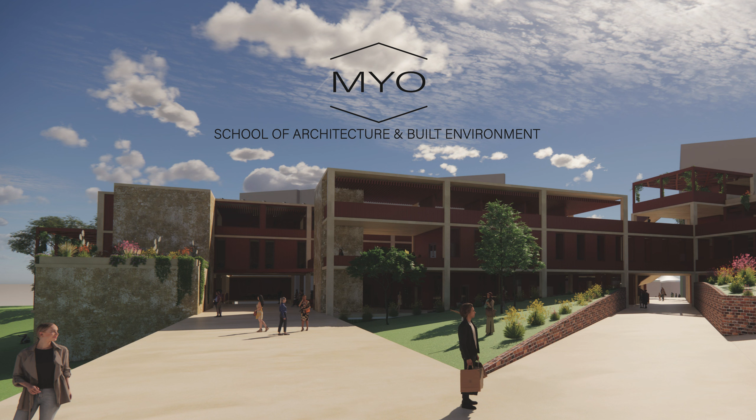I'm now going to present to you a proposed building for the new School of Architecture and Built Environment at QUT Gardens Point, as part of the new Science and Engineering Precinct Master Plan.

It is important to recognize and respect the impact indigenous people have had on the site and their knowledge about the land and environment, their way of living in harmony with the environment, only taking what is needed, connecting with each other and with nature.

The site for the future School of Architecture and Built Environment has opportunity for a strong connection to the river. The river was mainly used for fishing, hunting, and as a gathering space by the indigenous people. It will continue being a space for gathering and sharing of knowledge in this proposal.

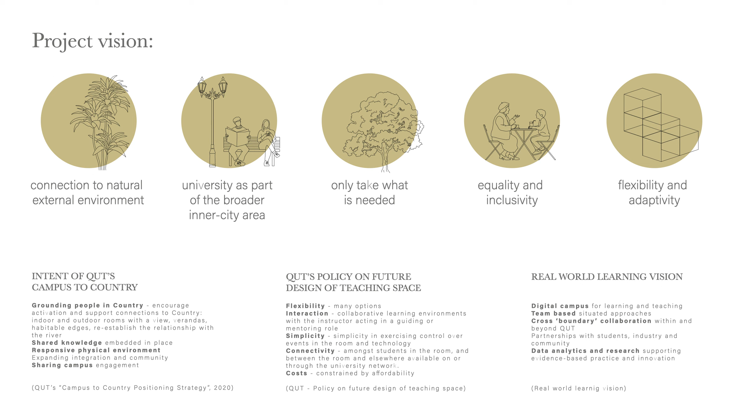This project will focus on five concepts: connection to the natural external environment, university as part of the broader inner city area, only taking what is needed, equality and inclusivity, and flexibility and adaptivity.

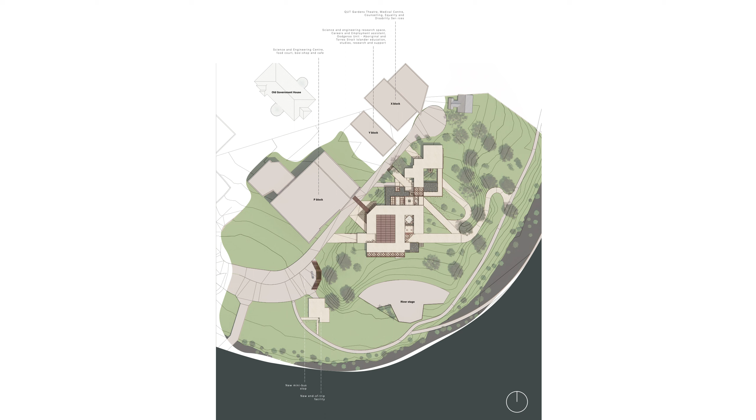As architecture now is part of the engineering faculty, the location of the new School of Architecture has great potential for connecting to the Science and Engineering Center, P Block, as well as Y and X Block. This connection will contribute to QUT's vision of cross-boundary collaboration.

It is important to build for the local climate in order to reduce energy consumed in buildings. In hot and humid climates, like Brisbane, the main priority when it comes to passive design is to keep the heat from the sun away and maximize natural ventilation.

Large parts of this site are highly likely to flood, as we saw a couple of months ago. The building is proposed to be placed above the estimated flood zone by a minimum of 2 meters, to take into consideration sea water rises.

The master plan of this precinct was developed from looking at existing walkways and connections on campus and extending and connecting them. Pathways running towards the site are proposed to extend into the site towards the river, meeting up with a path along the river.

This will create more opportunities to enter the site and make it feel more welcoming for the public to enter the space. The direct extensions is a deliberate strategy to make wayfinding easy, creating a sense of direction by clear visual connections.

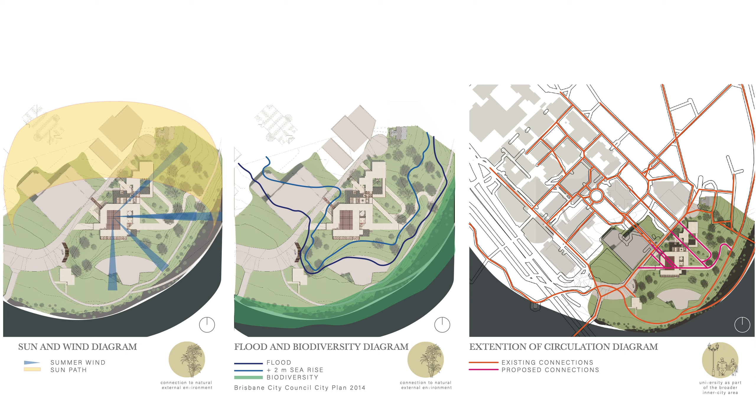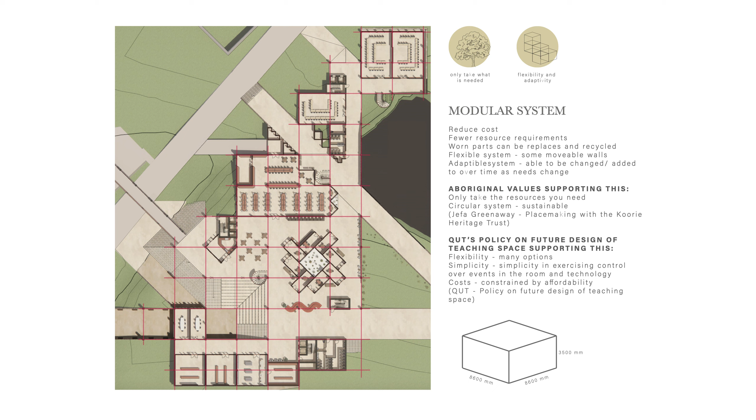The School of Architecture and Built Environment is proposed to be made of modular building systems. The flexible modules are creating a grid system that is rotated 45 degrees from the pathways. This is done to create interest.

The landscape has been proposed to be kept with minimal changes from its current status. The modules are proposed to sit lightly in the landscape, working with the slope, sometimes on stumps, which will allow for wind movement, sometimes on concrete slab, which has high thermal mass and allows for slow movement of temperature changes.

The load-bearing structure of this building is proposed to be poured concrete, made using local rocks to connect to the environment. Red gum timber can be locally sourced and will give the building a warm and natural feeling.

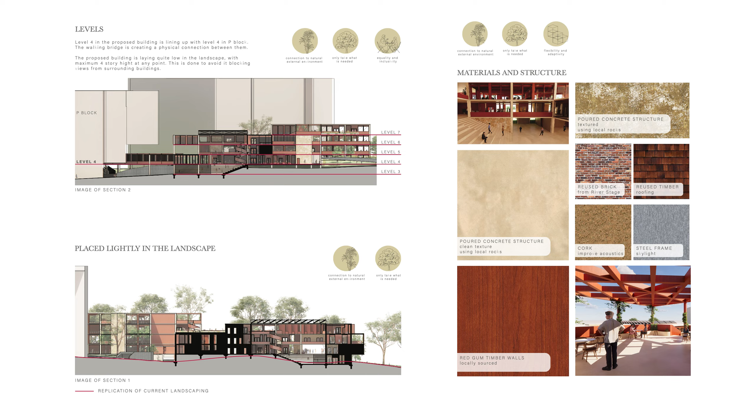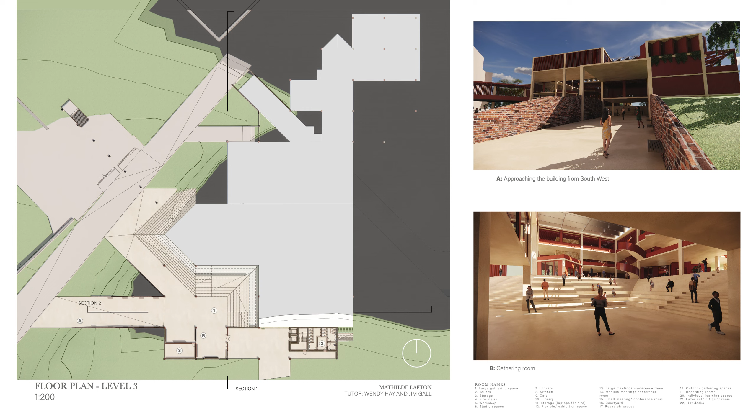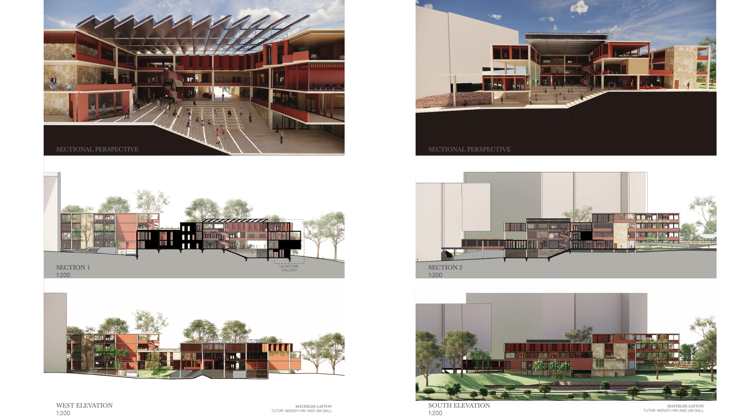Inclusivity and treating everyone as equal is something that I believe could be incorporated into the learning environment. An inclusive environment with a focus on human interaction and collaboration, where everyone can sit together regardless of title. This will encourage spread of knowledge across different groups.

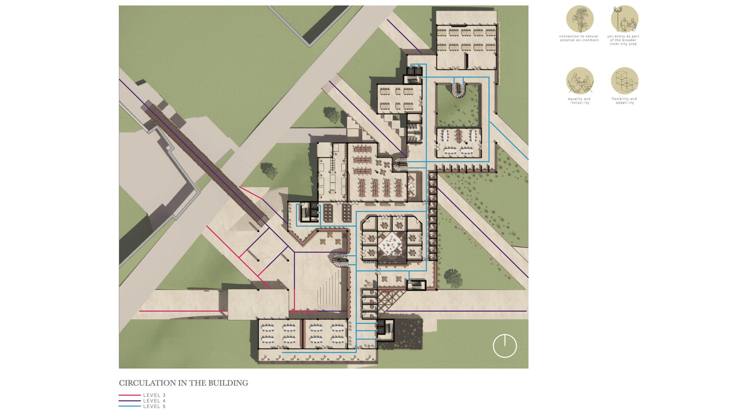The proposed rooms are therefore categorized into functions rather than who are in them: gathering spaces, collaborative learning spaces, studio spaces, and individual learning spaces.

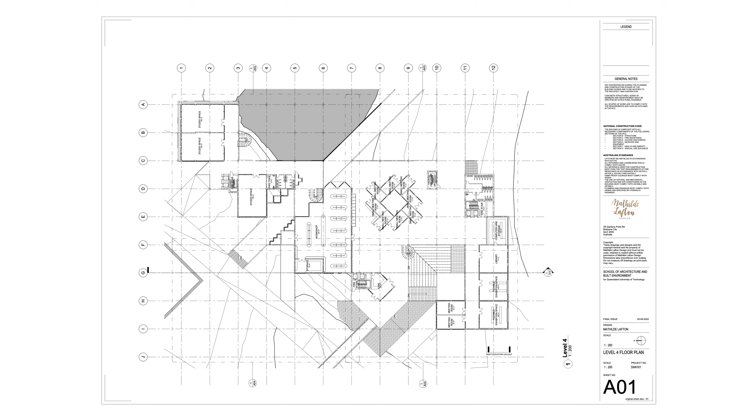Now I will go quickly through the documentation set, which can be studied in detail in the provided PDF document.

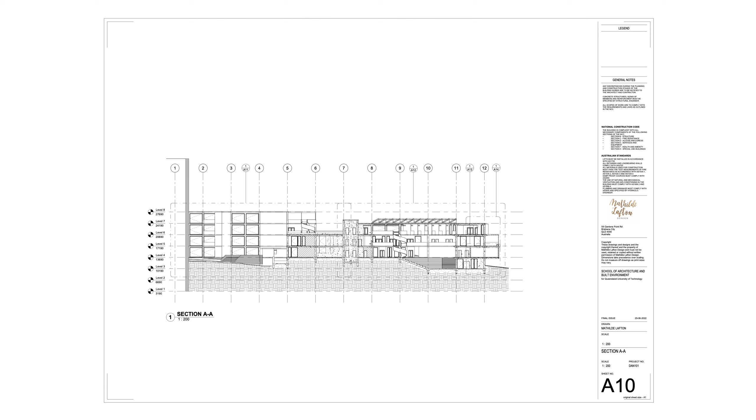Through understanding the climate of Brisbane, QUT's vision, and some Indigenous knowledge, I have proposed a building that creates space for students, teachers, and the public to come together. It is a transparent and welcoming space that allows for growth and inclusion. Thank you.